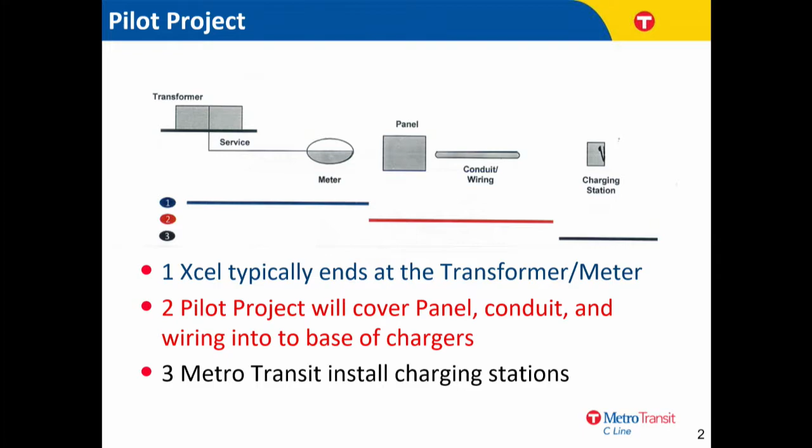Thanks, Pat. So a little bit of background on how we got here. Early in 2018, there was a council item to approve the purchase of the electric buses and the chargers that we're talking about here. And then in June, there was the Green Energy Partnership with Xcel, which laid out a number of initiatives, one of them being this pilot project.

So from there, we've got 2 different items for today, one being a MOU that lays out the broader vision for Xcel's pilot. Not only does it include this particular application for helping us with the infrastructure for the chargers we're installing in 2019, but also opens the potential for them to assist us and other customers with future projects like this.

The other item is the infrastructure agreement, which is specific to the construction, operations, and maintenance of what Xcel is proposing to install for us for our first round of chargers.

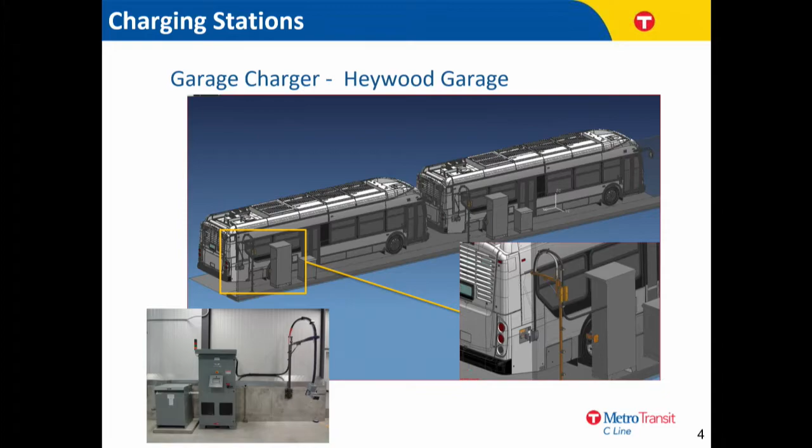So we've got 2 different types of chargers that are going to be going in. The first one is at the Heywood garage. These are the chargers that are going to work overnight to do the bulk of the charging to get the buses up to full capacity for morning pull-out. We've got 8 different chargers, so that we've got one for each of the 8 buses, and they can fully charge a bus in about 4 hours. So it'll be just like you go to the gas station with the pump, you'll pull up here and have a charger to plug into the back of the bus to charge it.

The other one we have is up at Brooklyn Center Transit Center. That's an overhead charger that buses will be able to pull up to in between runs when they're there to do a quick charge, to kind of top off the charge on the bus. A driver will be able to pull up to it, and there's a pantograph above the bus that'll come down to mate with the roof of the bus and charge it.

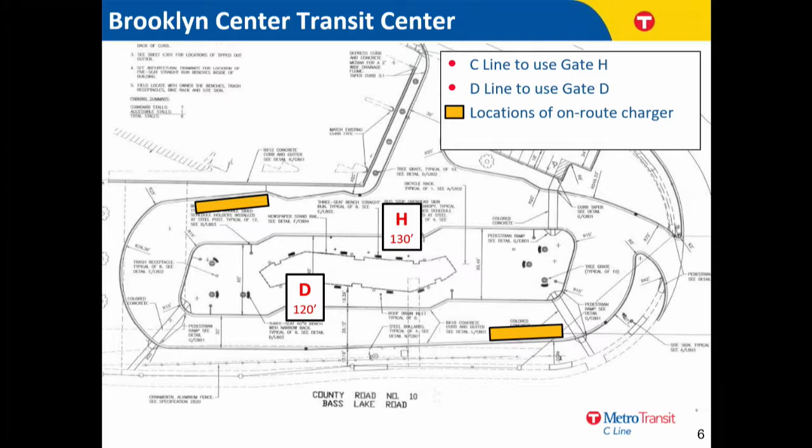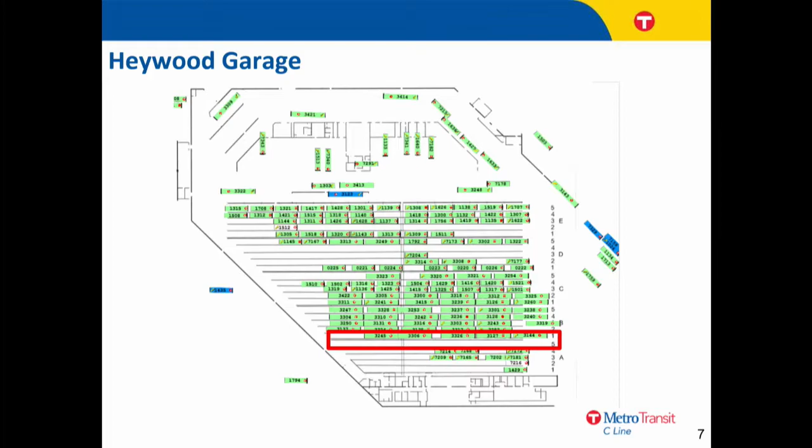So looking at Brooklyn Center Transit Center, we've got 2 different locations on the outer drive aisle where the buses will pull up to do that. Those are the yellow boxes you see on the perimeter. And then in the Heywood garage, the red outline shows where the chargers are going to go. They're going to go down the middle of two aisles so that buses can charge from either aisle.

We currently have our piece of the installation for the chargers out for bid. Bids are actually due tomorrow, so I'm anxiously awaiting that. And Xcel has bid their portion of the work, so they're ready to go and support us on this, assuming we can move forward on the agreement we discussed.

That'll encompass a temporary charger to help with the first bus coming in January, and then permanent charger installations coming later in the spring, so that we can support testing, training, and getting ready to operate service for the C line later next year.

So just as a refresher, we're looking for approval today to negotiate and authorize the regional administrator to execute both a memorandum of understanding as well as an infrastructure agreement with Xcel. And with that, I will entertain any questions.

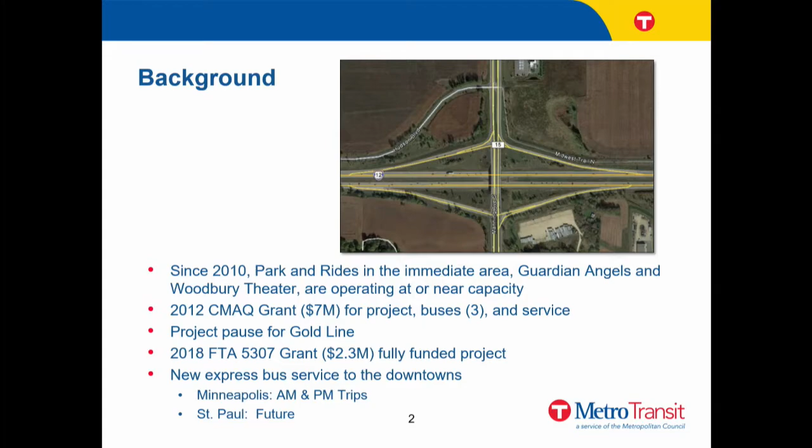Reasons being access and visibility. We also realized that we needed a little bit more money to do this. So in 2018, this year, actually back in '17, we programmed the funds, but applied for the grant here in '18 to bring in another 2.3 million to fully fund the project. But this project will, on the day it opens, provide AM and PM trips to Minneapolis and the future St. Paul.

Much of this mega block is owned by EN Properties. They have about 65 acres and they've been looking at developing it for the past couple of years in a couple of different segments. They've got some local school property with school district interest in a bus garage facility, believe it or not. We know a little bit about that, as you'll hear later.

We aren't doing that realignment, the developer is. So as part of this project, it's been a lot of coordination with the developer, the city, the county, and MnDOT, since we've got the highway, and a segment of the road is MnDOT's while the other piece is the county's. We're coordinating with all those entities to figure out where this roadway realignment will happen. You can see it shifts up to the north and ties into Manning at an existing intersection. That frees up the space for our park and ride, as well as development for the developer.

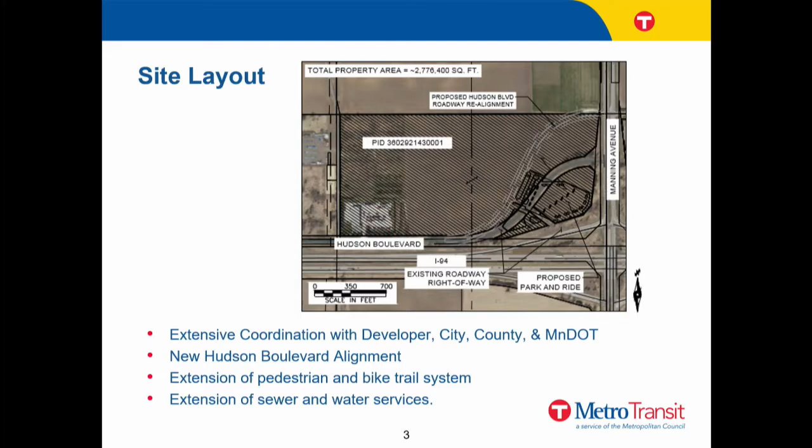So zooming in a bit more on the park and ride site layout itself, we're talking about 550 parking stalls on a little less than 6 acres. This facility will include a bus operator restroom, given that it's so far out to the east in the system. This will be a terminus point and a spot for drivers who bring their buses out there to lay over for a few minutes before they start their trip. Having those facilities is important from that operational perspective.

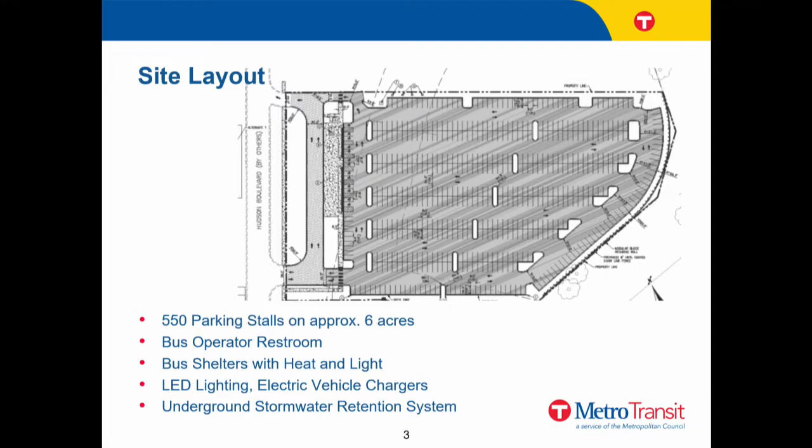We'll have bus shelters with heat and light like we do at all of our park and rides. The parking lot will be lit with LED lighting. We'll have a couple of electric vehicle charging stations, and you don't see a stormwater pond here because we determined it was more cost effective to do underground stormwater storage instead, underneath the parking lot. The primary reason is we didn't have to buy additional property to put that in place.

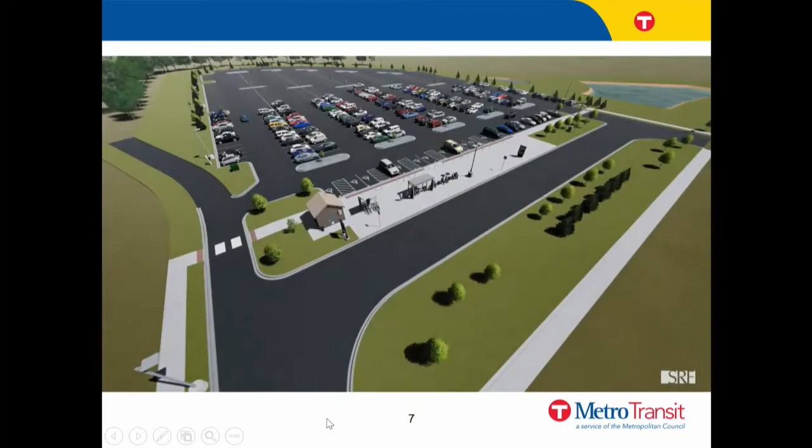So let me see if I can get this... Oh, Greg's got it going for me. Our consultant put together this little flyover rendition of the park and ride so you can see what it's going to look like. It's a little one-minute clip. What you're looking at is the boarding platform area where the buses will pull up on that near side roadway.

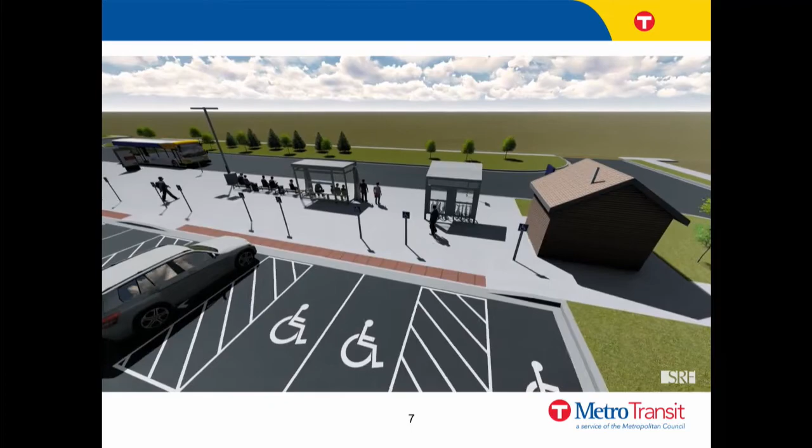We have a couple of shelters out there, initially one, but eventually two. You can see a structure there for the driver break room.

The other nice thing about the development aspect of this is that not only do our passengers have strip mall type amenities close by as they're coming and going, a gas station right there, but also our drivers can hop over there if they need to.

Just a little bit about the funding and budget for this project. As mentioned, we have a CMAQ grant from the 2012 cycle, as well as federal funds we received this year in a grant, totaling about $7.65 million. Both of those are 80-20 federal-local match type arrangements.

For the project, particularly with this business item, we have about $3.5 million of land acquisition we're doing, $3.55 million worth of construction, and a little over $500,000 in project management, construction management, and architectural/engineering consultant costs.

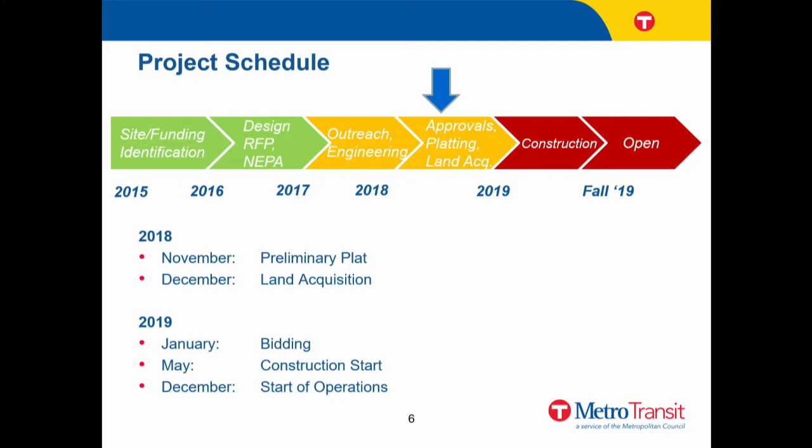And with that, I will stand for questions.

Councilmember Lutovsky: Great, thanks. So Pat, are we still going to have the other, was it Guardian Angel location?

Madam Chair and Councilmember Lutovsky, yes, we will. Those facilities will still be in full swing. But this facility, we anticipate, will at start of day one be at roughly about 250 car capacity, and it's sized for a 2030 timeframe.

And where are those people going to be coming from?

Madam Chair and Councilmember Lutovsky, yeah, it's a good question. One which we just recently did the park and ride study for this year. We do not have all the data yet for the parking license plate information, but that was part of the study this year. So we'll have a better sense of who's parking in Guardian Angels and the theater lots at this point that would divert to here. But primarily it's going to be Eastern Woodbury, Lake Elmo folks, anybody between here and the river.

So I'll just leave that at that point. But I'm going to jump to, I already covered that stuff. We'll jump to slide 3 here. I just want to orient you a little bit.

The new garage will be about 350,000 square feet. It'll house both maintenance and storage of the buses, and we anticipate about 216 buses will call this location home, which is on par with the East Metro Transit Facility. The only bus garage that's larger than this from a capacity standpoint is the existing Heywood facility, which is part of the problem—it's overcapacity. It actually has a smaller footprint, and some of the buses will move into the new garage as part of a way to get that facility back into an efficient operation.

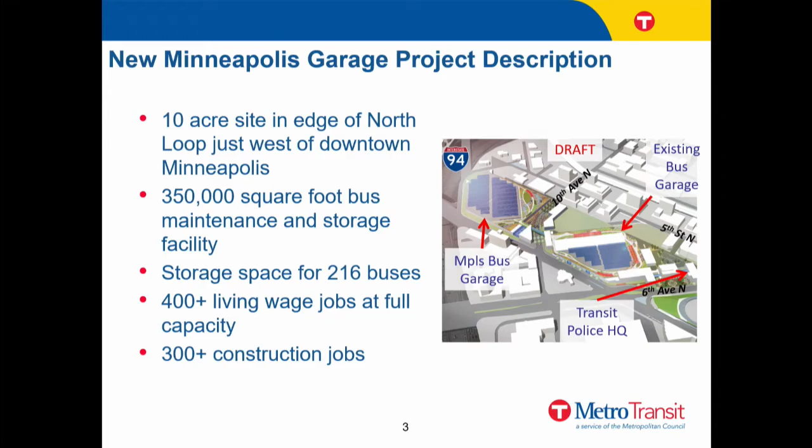We looked at the needs for this facility. The main point, even back in 2006, was that a lot of our service is oriented around the Minneapolis area, particularly this corridor. At the time, it was all roads led to Heywood, that was kind of the mantra, and that led us to the land acquisition and everything that kicked off this project. The other part of it is access—I mentioned that with the 94 and Manning park and ride project, but making sure we have good access to the highways and infrastructure that allow us to get our buses around was important as well.

And then there's the ability for our employees to access the site, and this is an ideal site for that. It's close to North Minneapolis. We anticipate as part of this project there will be an effort to recruit and train people in the area. We know that would be a big benefit to that part of town, and so we intend to draw from that area as future employees.

And then lastly, this rounds out our campus approach. You've been involved and heard about our campus master planning, this being a big component of that. Having all the services, management, the TCC all in close proximity to this facility really helps in our efficient operations overall.

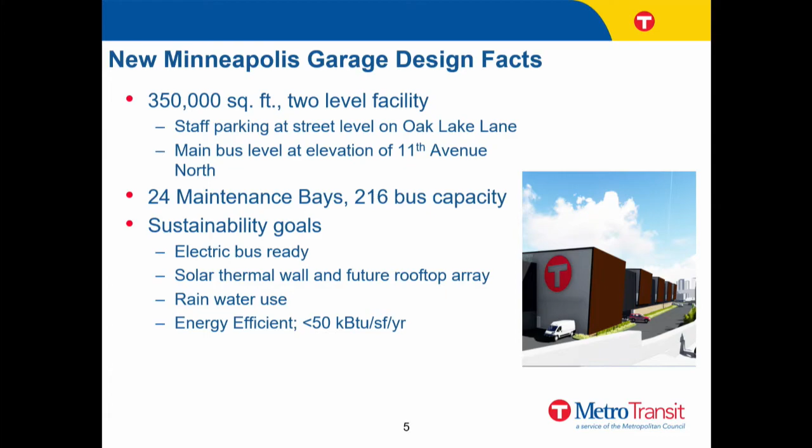The other piece is really bringing the next generation of maintenance facilities for our staff, our mechanics, our operators. We're looking to have 100% Wi-Fi coverage throughout the facility. The reason that's important is as we bring in new tools, new technology, most of those are running on Wi-Fi now, so having that capability, along with all the different lifts and equipment we need for our staff, really looking to better support our preventive maintenance functions so that we're meeting or exceeding our goals for mean time to failure out on the street.

One of the things throughout implementation of this project that's been really beneficial to the design team is having a core advisory team made up of folks from operations, maintenance, and material management to help us inform the design process, to make sure that what we're putting out there is going to be efficient and effective for our staff who are doing the work in the facility.

From there, this supports several of the Thrive 2040 outcomes. You heard some about sustainability a few moments ago, from the electric buses to the thermal wall, the water storage, and other methods. Also looking at equity—you heard Pat mention potential jobs for North Minneapolis, the job count in general, but also providing the necessary storage we need to meet the expansion of service. Right now we're over capacity, and as we look to expand service, we need a place to put the new fleet. Finally, looking at livability, as we support that expansion of service, that increased access to transit throughout the community—as the population grows, this facility will help enable that.

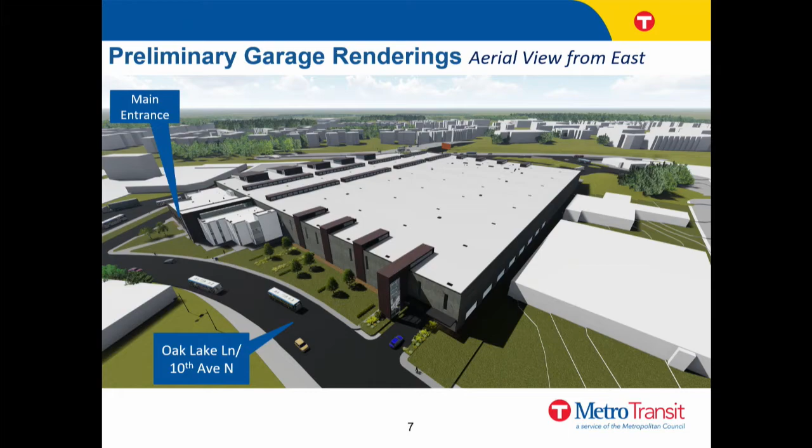So we'll walk through a few renderings here with a number of fly-throughs as well. This is looking from the east. We've got 10th Avenue on this side of the building, the main entrance that Pat referred to earlier where employees will enter the building, as well as the entrance into the operator's suite. And there's the Transit Control Center across the street.

Staff parking entrance down below off of 10th Avenue. Bus parking will be up on the second level, or the main level. Bus entrance off of 11th Avenue. And then the bus maintenance area is toward the upper portion of the screen there. Those pop-ups you see are windows, or ceiling windows, into the facility to bring natural light in for those workers.

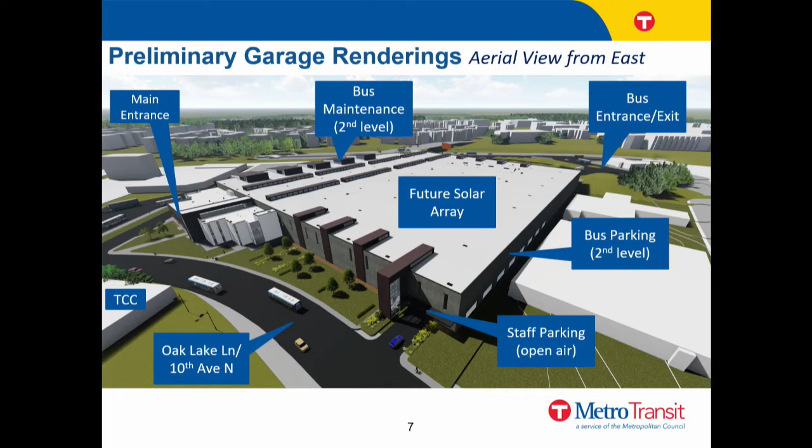And also the potential - we've got a big open flat roof here, so there's strong potential for putting a solar panel array up on the roof in the future as well.

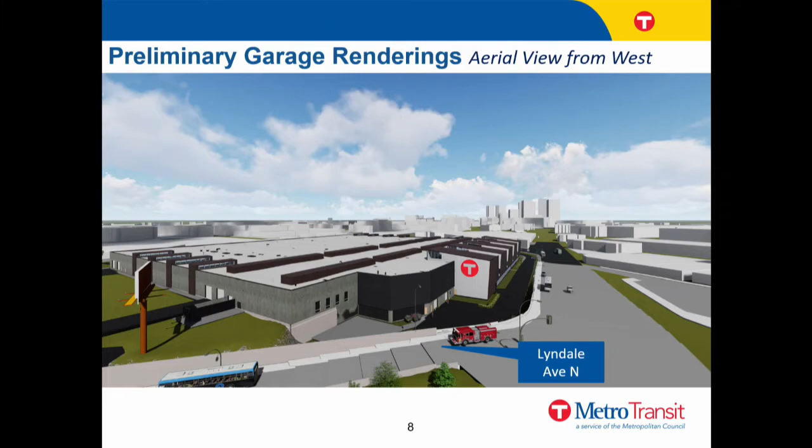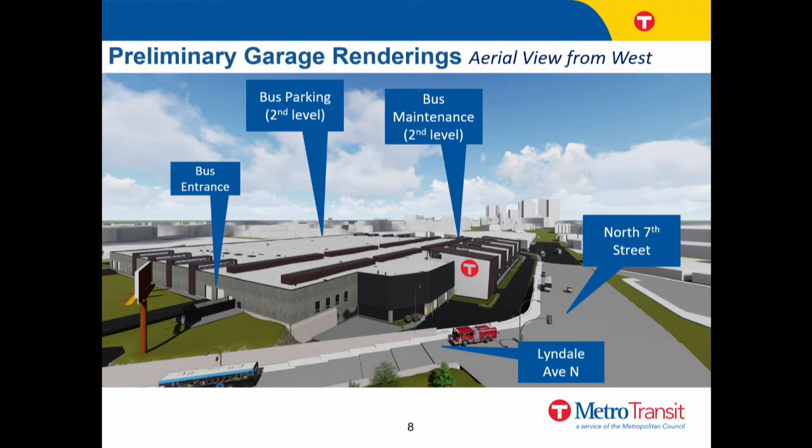Looking from the other side of the facility from the west, we've got Lyndale Avenue and North 7th Street. And then again, that bus maintenance area with all the ceiling roof openings to bring in natural light. Bus parking up above, with the bus entrance off of 11th and exit onto 11th as well.

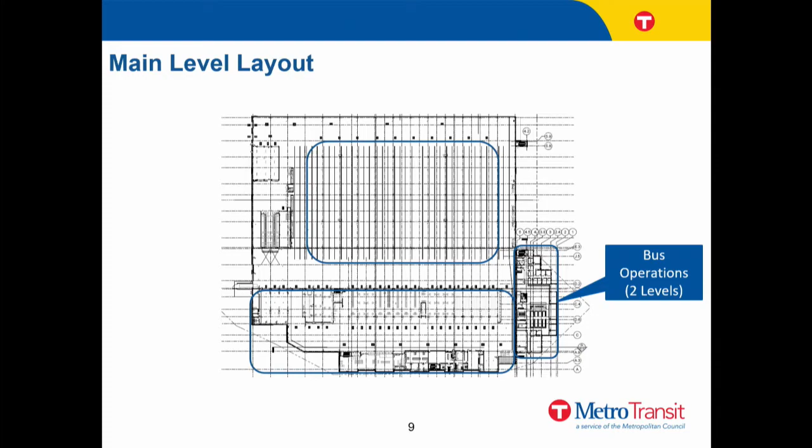Just looking at a floor plan here, this is for the bus storage area. We've got the operations suite called out to the right, bus parking for the 216 vehicles we mentioned before, an area to change tires, an exit area onto 11th, a fueling area, an area to wash the buses, the pull-in door where they'll enter the facility, an area where they'll stop and have fares taken off the bus with cash counting capabilities, and then the bus maintenance portion of the floor.

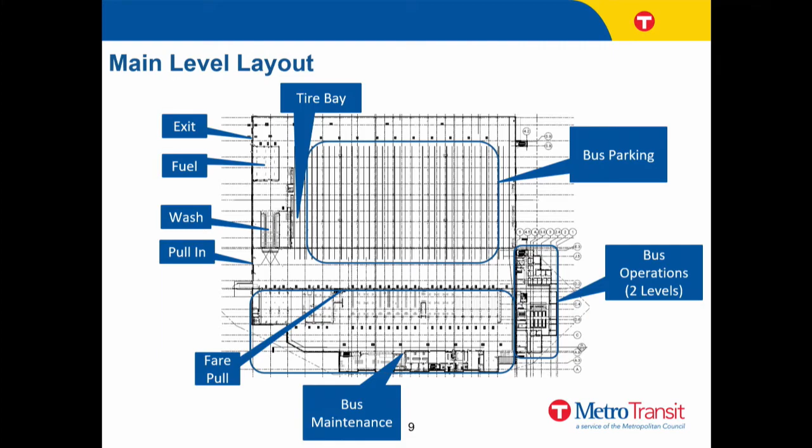So for where we're at today, as Pat mentioned, this one's been a long time coming, starting with the first land purchase in 2006. At this point, we are rapidly approaching the end of design. The design team is working to have those construction documents ready towards the end of the year, allowing us to go to bid early next year, then look to award a contract and start in spring. It's estimated to be about a 2-year construction timeline for the project, so that puts us at mid-2021 for opening this facility. With that, I'm going to turn it back over to Pat to talk a bit about funding.

We've got equipment, as Carrie was mentioning - state-of-the-art equipment, both from lifts and hoists and things to properly control the indoor air quality in the building. All of that plays into this facility. It will be state-of-the-art on the day we open it. And then there's the $87 million worth of just pure construction.